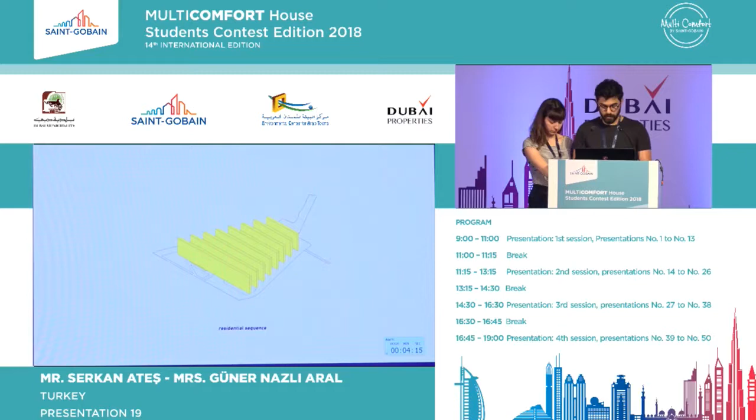According to close environment surroundings, we created a system of axes which works as a bridge between the surroundings. We rearranged heights to link the sequence together, and we formed residential sequences into a new topography.

This new topography consists of metaphoric hills that will repair the connection between human scale and the Dubai city.

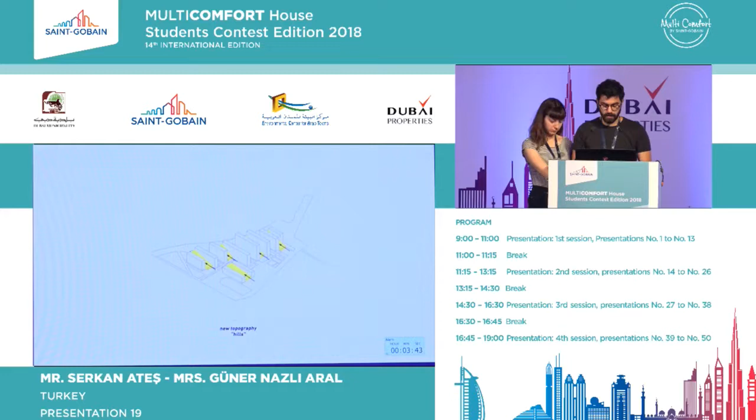We suggest in-between spaces between isolated indoor cold and outdoor hot. We suggest a walking speed between an elevator speed and the stability of desert. We suggest hills between heights of a skyscraper and a ground zero.

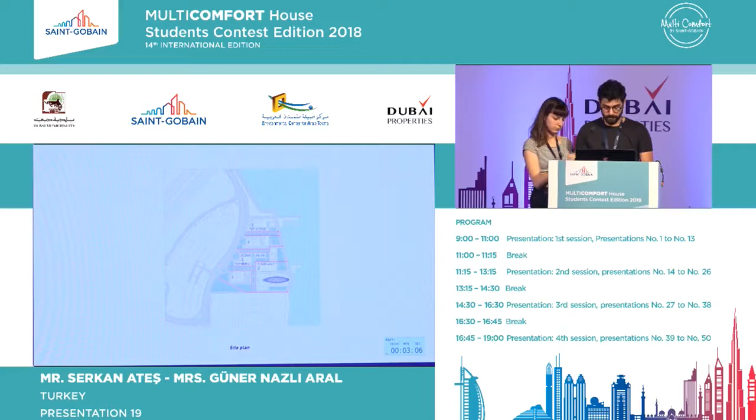With permeability of the design, the coastline becomes accessible to public, and thus the coastline becomes a focal point rather than a border. With surrounding connections, the whole structure turns into a center of attraction with floor-level programs.

Okay, let's continue. At the intersection of pedestrian access on the north and south side, the gym and the sea taxi are located.

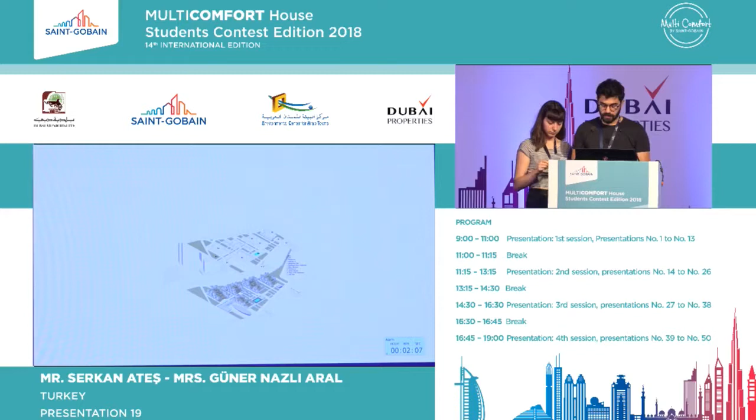Residence entrances and parking lots are connected to the main road. Thank you.

Our wind strategy is simple: fast in, slow out, meaning a cooler airflow.

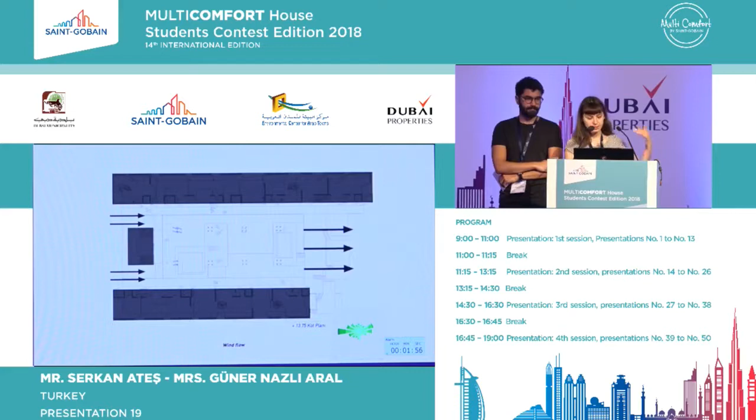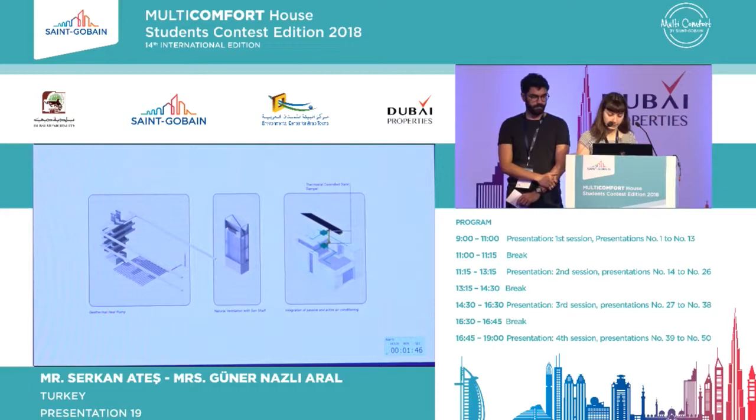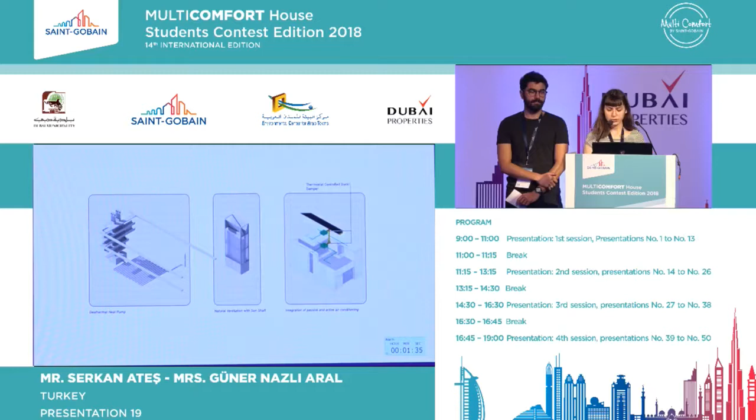This is the air conditioning strategy. A geothermal heat pump under the blocks filters air and passes it through underground cooling tunnels and then to the residential units. The sun shaft helps the system move the air passively. Thermostat-controlled duct dampers integrate the passive and active air conditioning.

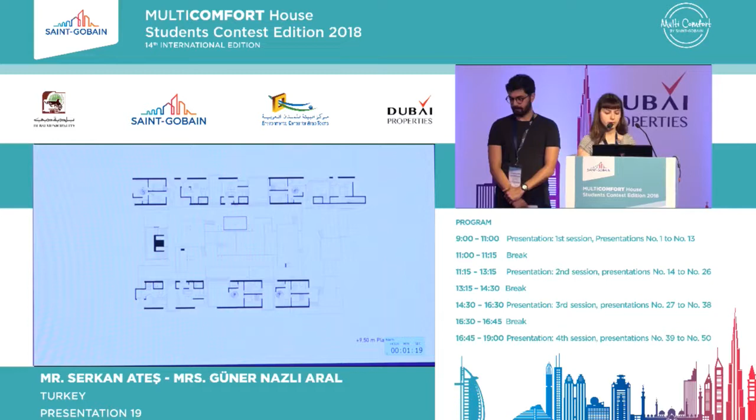This is a 7.50 meters level car park plan. Each floor has a unique combination of units, and you can see the relation between the units, inner gardens, and the hill itself.

While providing access to the residential and commercial units, hills are also working as a social condenser in the region with its various programs inside.

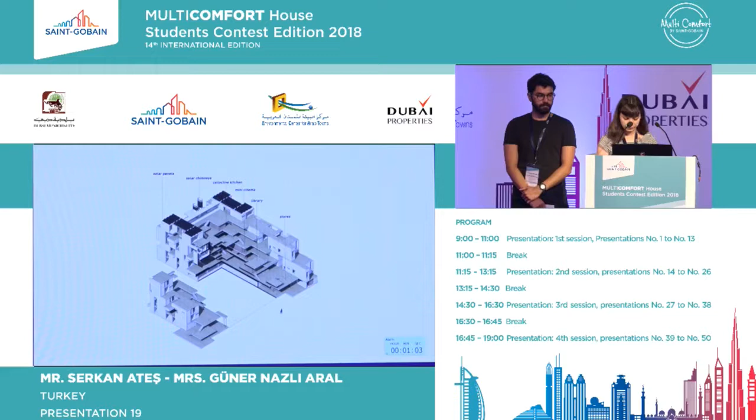This system section shows how hills work in technical ways, and which products are selected to use. We use Isover slab as acoustic and thermal insulation, Climaver for the self-supporting duct system.

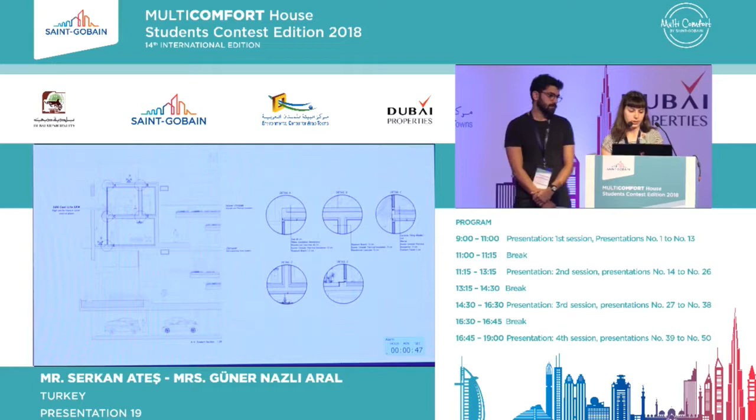A sun shading strategy is like a war against the sun in Dubai. We adopted the phalanx formation of the Roman army as a total structure. We have a collective sunshade of units; each unit shades the neighboring unit. That's the basic idea.